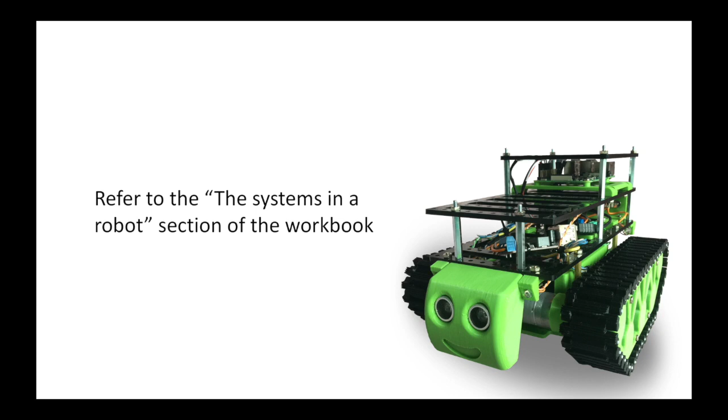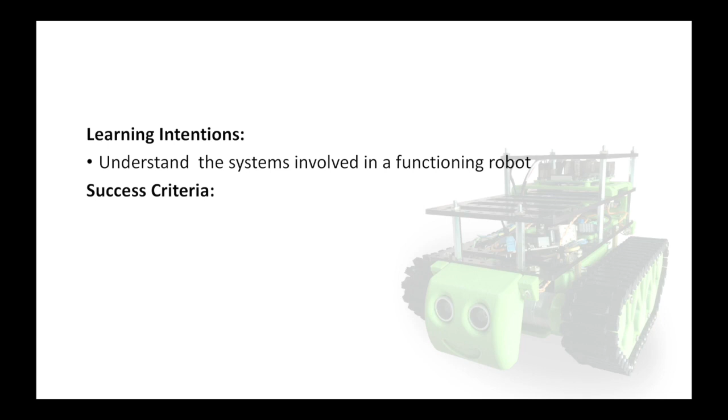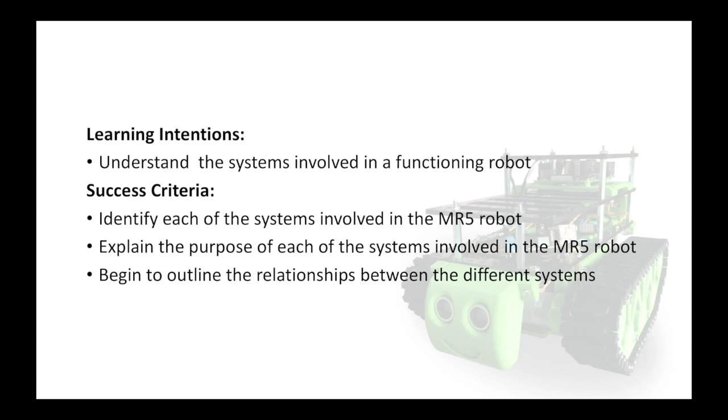The learning intentions are to understand the systems involved in a functioning robot. The success criteria is to identify each of the systems involved in the MR5 robot, to explain the purpose of each of the systems involved in the MR5 robot, and to begin to outline the relationship between the different systems.

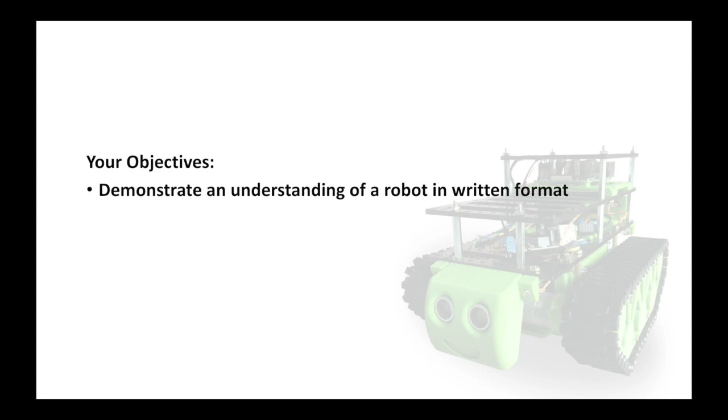Your objectives will be to demonstrate an understanding of a robot in a written format and demonstrate an understanding of the MR5's key systems through a mind map.

A robot can be considered as a set of working systems. So what is a robot? For our purposes, a robot is a device designed by humans to do work. By work, I mean physical activity.

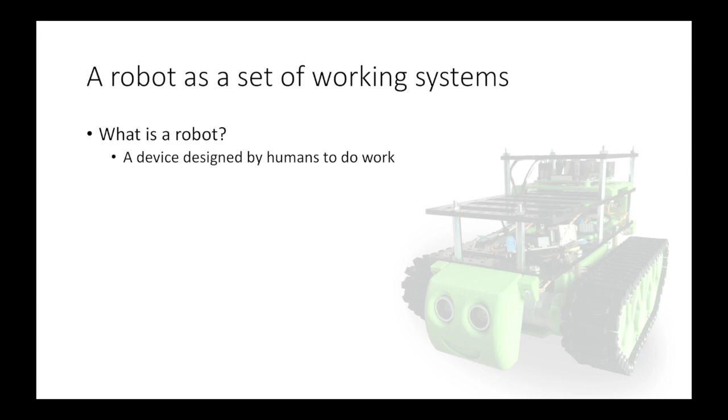Usually it involves mechanics and sensors. It usually is controlled by a computer program, and it involves a lot of systems. A system is a series of components that work together to achieve a purpose.

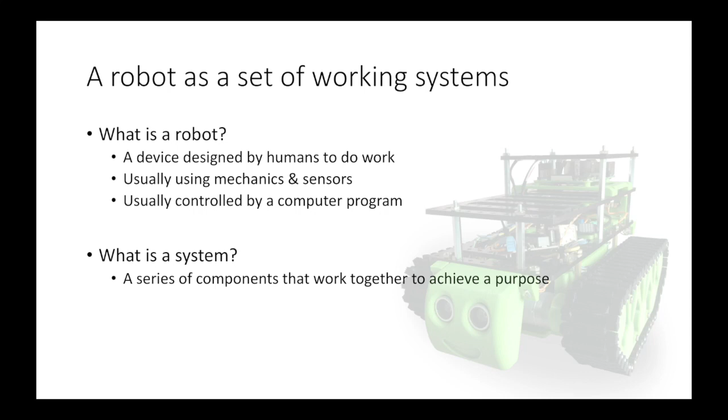The MR5 has a lot of what we call passive mechanical systems. The passive mechanical systems act like our skeleton. They provide the robot with shape and action, but these do not work by themselves.

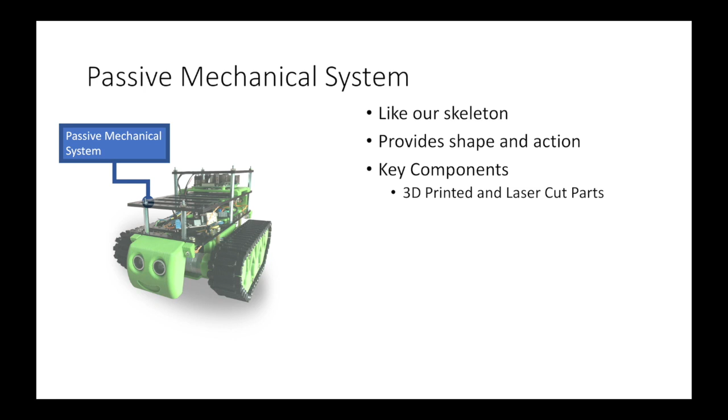The key components are the 3D printed and laser cut parts, 22mm steel bearings, the same type of bearings you find in fidget spinners and skateboards, and 30mm brass or steel offsets. The key purposes are to provide shape and mechanical capability. It's also to hold electronic componentry and allow for further prototyping.

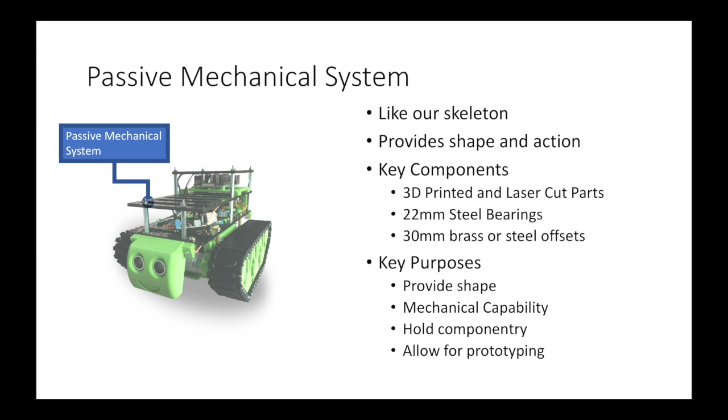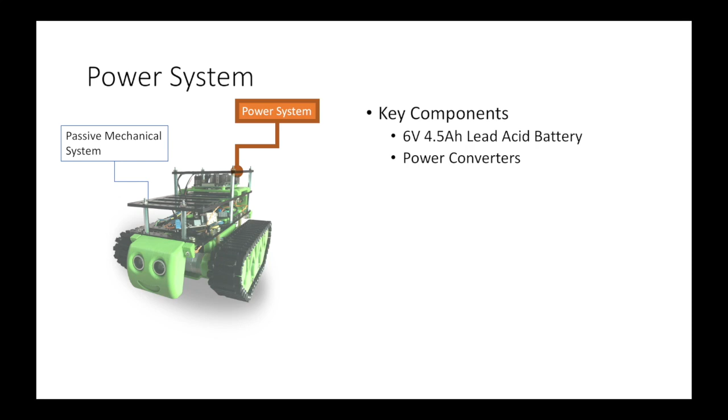The power system has a lot of key components in it. The main components that we need to consider are a 6 volt 4.5 amp hour lead acid battery, a number of power converters, an on-off switch, which is silly to consider, but it is actually a key component, and a charging port.

The key purposes of the power system are to power all electrical components in the system, to be low maintenance, to have a long use time. This one will last typically 2 hours under normal operations, and to be capable of powering expansions that we might decide to put onto the robot.

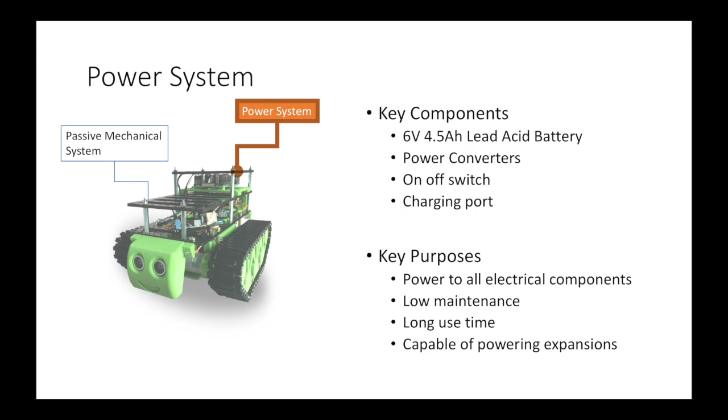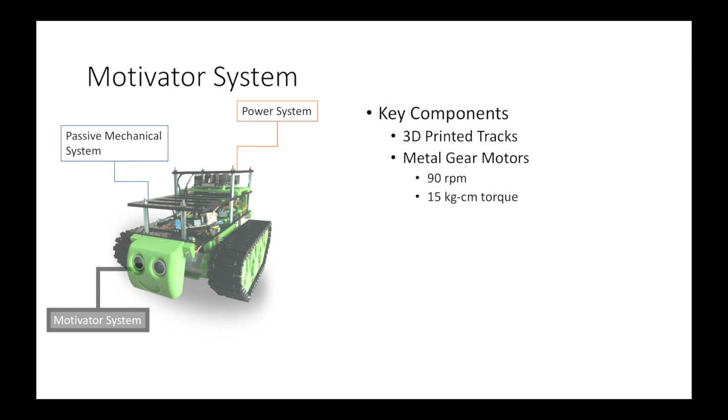The Motivator System or motion system has the following key components: 3D printed tracks, metal gear motors that in most cases are running at a 99:1 gear ratio, which work at 90 revolutions per minute, have a 15 kilogram centimetres of torque. They also have this thing called an L298 difference motor driver.

This enables the motor to be able to be controlled by a low voltage system that runs on 5 volts and step it up to the 6 volts required to run the power of the motors. The key purpose of the motivation system is to move the robot.

The sensor system has the following key components at this stage: an ultrasonic distance sensor, which basically are the eyes on the front and work using echolocation, a photo gate, which is designed to sense the speed of the motors, and the key purpose is to allow the robot to respond to objects and conditions in the real world.

In future, the robot will also probably have a color sensor, a black and white sensor for sensing objects on the ground, and also some gyros and some temperature sensors.

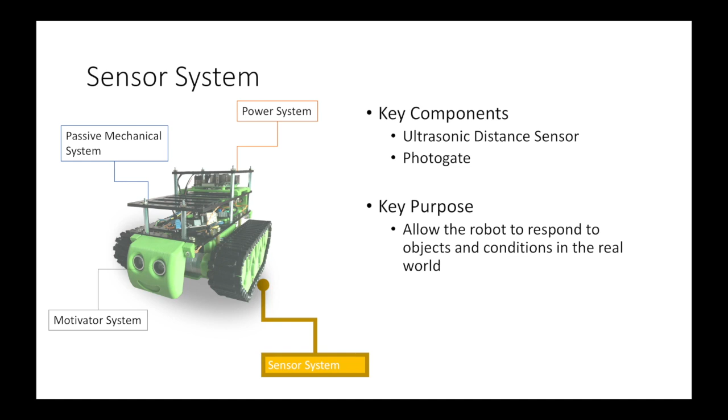The processing system has a key component being a Raspberry Pi 3 computer. These Raspberry Pi computers have GPIO pins which control the circuitry that make the robot.

It has a minimum 8 gigabytes of onboard memory, which means you can store quite a lot of information on it. And it has USB external storage, which means that when you save your work, you can save it to a USB external file rather than the onboard memory.

This is safer because the robots will be re-imaged on a regular basis. It also has Wi-Fi and Bluetooth connectivity and will primarily use the Wi-Fi, although we may expand to use Bluetooth for remote control. The key purpose of this is to control both the motivation and sensor systems.

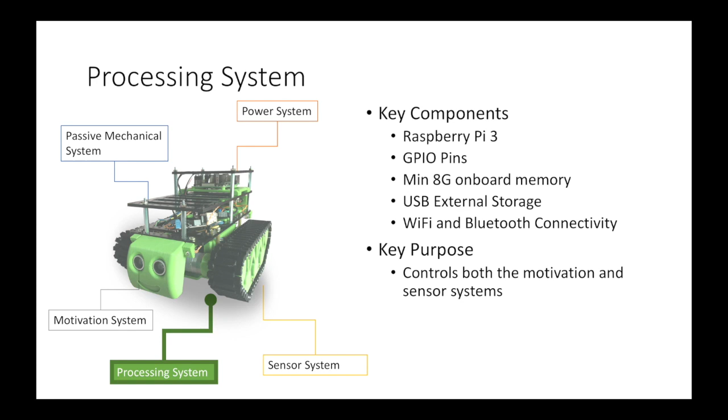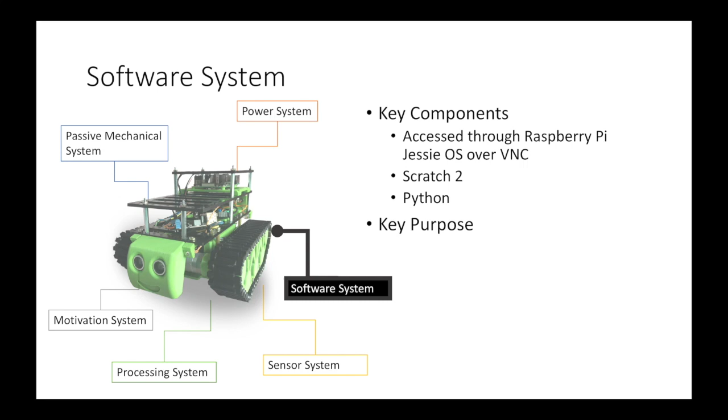We also have a software system. The software system is accessed through Raspberry Pi on an operating system called Jessie, and we access that over something called virtual network computing. We'll be using Scratch 2 to program for the first part, and we'll be moving to Python as a secondary. The key purpose of the software system is to allow humans to create instructions that allow the robot to carry out its task.

The system relationships work as follows. We have a human who writes to the software system. The software system controls the processing system, so the software controls the Raspberry Pi. The processing system gets data to and from the sensor system. The processing system also tells the motivation system to move.

The motivation system then interacts with the passive mechanical system to make the motion happen. This in turn also feeds back into the sensor system.

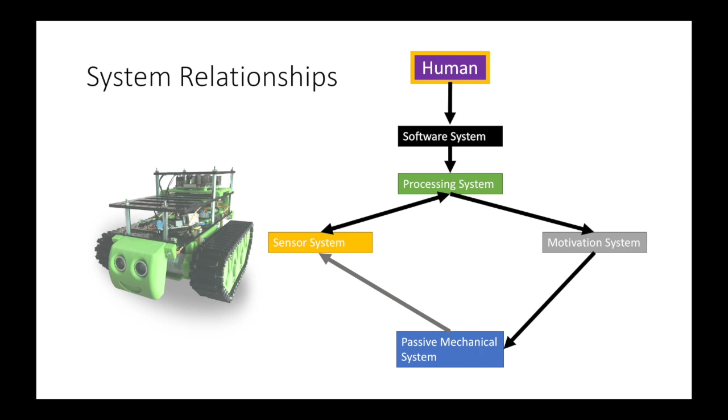Underlying all of this is a power system. The power system controls or gives power to the sensor system, to the processing system, and to the motivation system.

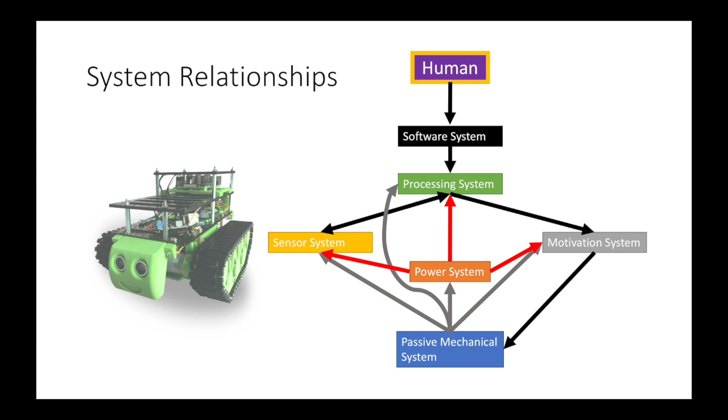In order to complete this activity, you need to go to the workbook and find the relevant pages. Once you've completed that activity, which involves filling out some information about what is a system and what is a robot, you then also need to do a mind map on the systems involved in the MR5. Once you've completed this, you need to scan it and Dropbox it to the appropriate Dropbox on the LMS.

A student working beyond grade level will present an externally researched understanding of a robot, stretching from an historical perspective through to future predictions.